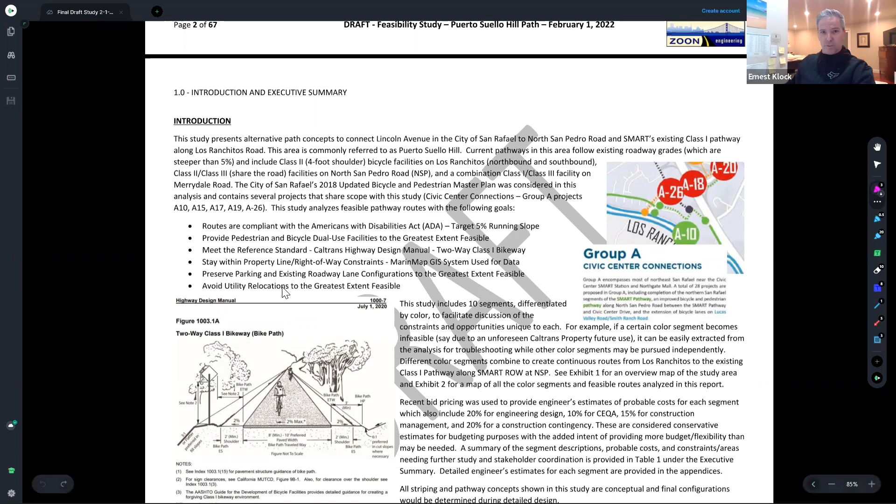And avoid utility relocations to the greatest extent feasible. The highlight reason for taking this approach is really just to look at all the alternatives and identify feasible routes without additional study. As the report was being developed and as I started digging in, I found there was a need to do significant more stakeholder coordination to come up with solutions to some of the identified constraints. So at this level, the report as is gives the stakeholders some options of routes to study further, but there is definitely more analysis needed to further the results and get to design level documents and hit all the constraints.

So this is an aerial view of the study area highlighted in yellow. The existing Caltrans class 1 path is denoted by this pink line. It ends at the top of Merrydale here and joins the roadway—that was one of the first connection points for the pathway alternatives. And then the existing SMART class 1 path is here at the bottom of the document, and that was the terminus or other connection point to this study.

In looking at the routes, we came up with 3 alternatives. The first, for lack of a better naming convention, is this green route, the Merrydale North San Pedro route, that comes down through this green segment, connects to a cyan segment along Merrydale, and then ultimately connects to North San Pedro Road going this way. Though not officially part of the study, we did notice there is a vital link to get this eastern connection over to Marin Civic Center, Venetia Valley School. So we did analyze a short segment we termed light blue here to make that connection and not leave cyclists traveling eastbound stranded at this intersection. But really the analysis does look at the Merrydale North San Pedro route as one continuous route to connect down to the SMART path here.

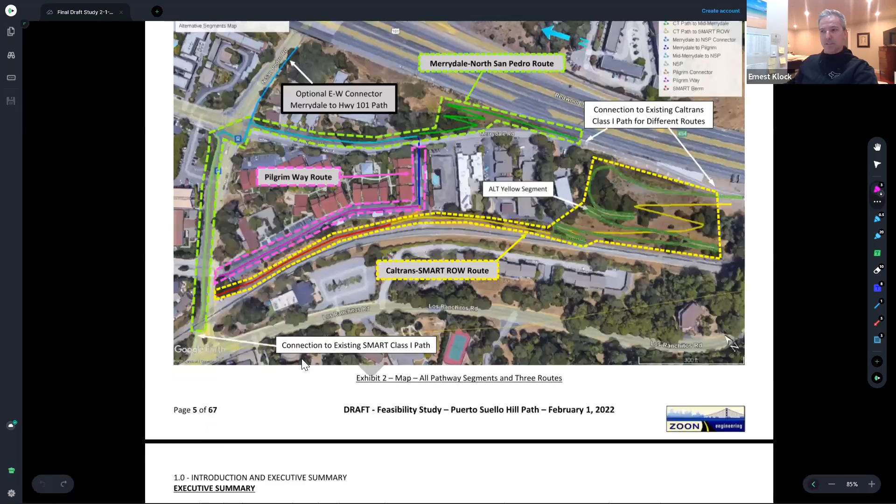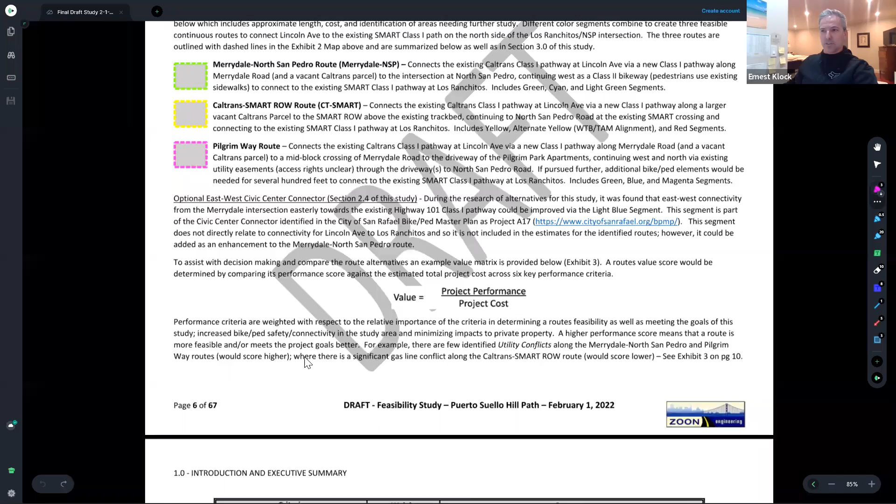Before we do that, the executive summary highlights the constraints associated with the route. I'll skip forward to highlight a useful tool in planning: getting stakeholder input on a performance score weighed against a cost estimate to come up with a value score for each alternative.

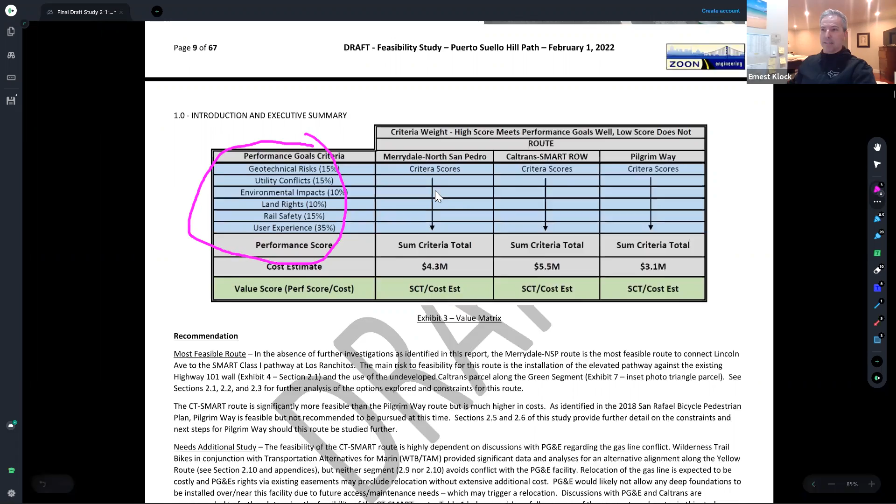As I develop each of these routes, I identify performance goal criteria that can impact the feasibility of a route and the user experience, along with the constraints of implementing it. If desired, you could assign criteria scores to each segment and weigh them, maybe in a public forum for feedback. This part of the report discusses the rationale for each criterion, how it's developed, and how it could be used to analyze these routes.

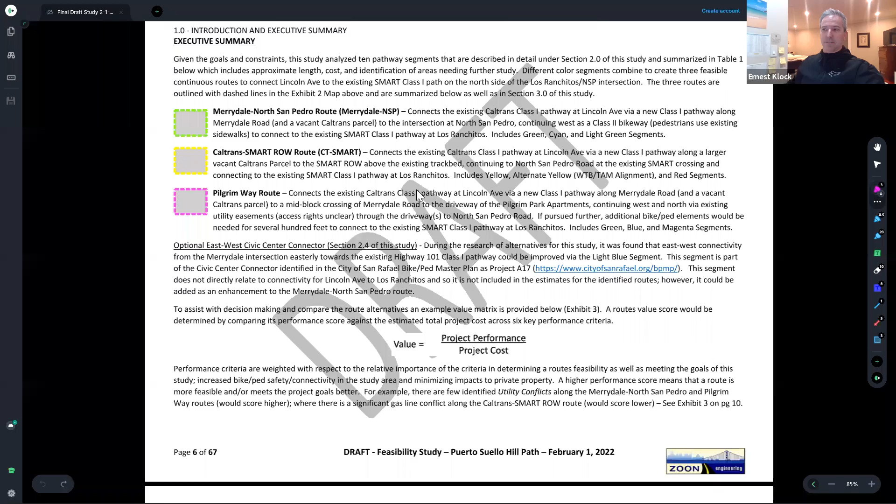In the executive summary, we have a summary table highlighting all the areas needing further study for the different segments. If you combine these segments, you get a continuous route down from the Highway 101 path to the SMART right-of-way, existing Class 1, at Los Ranchitos and North San Pedro.

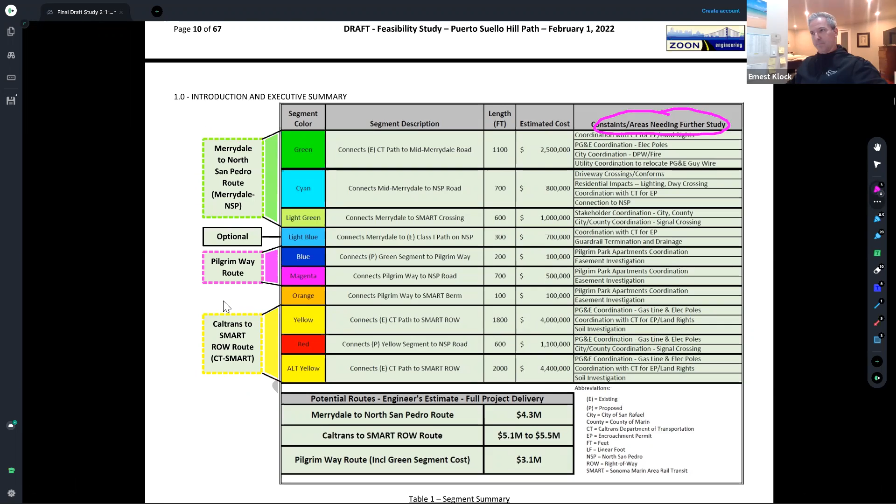Let's look at the first green segment. Again, this is a little plan view. It utilizes an existing Caltrans parcel, probably left over from the freeway development. This segment traverses a portion of the top of Merrydale Road, crosses the hillside, and comes out right at this Pilgrim Way entrance.

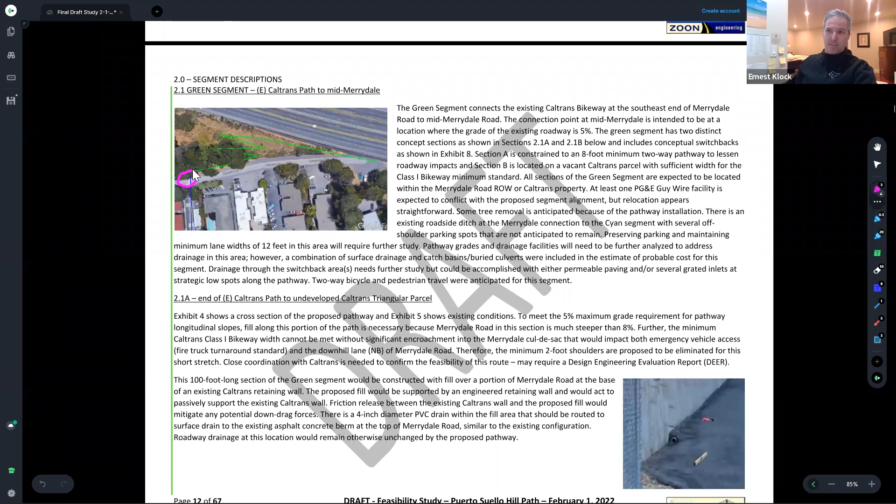The green segment has certain characteristics. One of the hardest things is fitting the pathway in at the top of Merrydale, so there's a couple things at play here. This is the end of the existing pathway. We all know it's pretty steep, although it's 8% with turnouts to meet ADA. Caltrans, I believe, built this path many years ago, and when it exits here, the roadway grade becomes quite steep.

So when I went out and measured, as evidenced by this pink line, using some smart tools, I found a way to get a 5% grade pathway from the terminus of the existing bike path onto this Caltrans parcel.

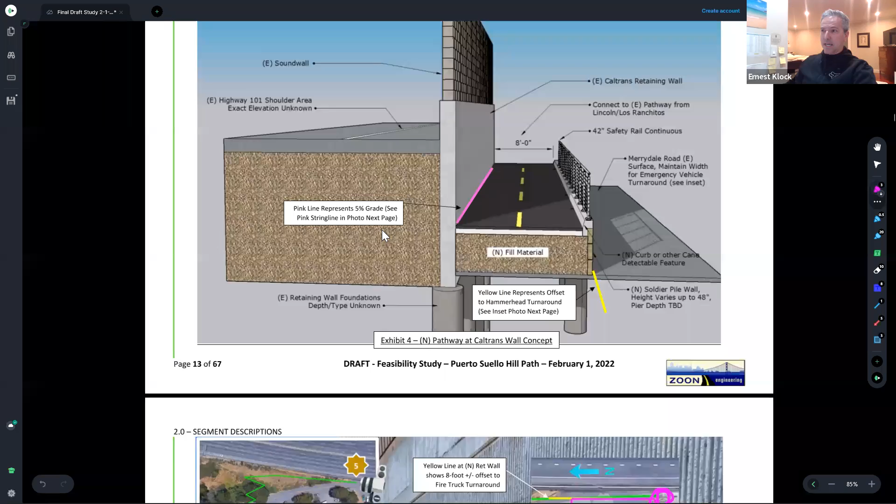And to do that, we need to fill in. This is kind of what the concept cross-section looks like. This is the existing freeway sound wall, this is 101 southbound, and this is what the fill area would look like.

Unfortunately, without significantly modifying Merrydale, doing parking impacts, moving center lines, looking at utility relocations, and impacting the ability for fire trucks to use the turnaround here, without doing that, we're left with an 8-foot path. So you do lose some of that Caltrans design standard, the 2-foot shoulders for pedestrians to walk.

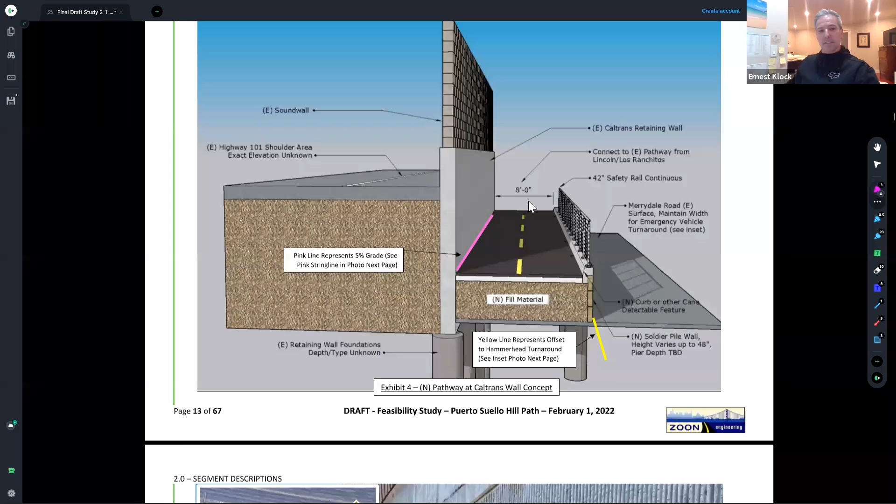Rather than reconfiguring the whole Merrydale intersection with all those impacts, this is one example of how the study analyzes losing those 2-foot shoulders for this very short segment to come up with a more feasible project. That's discussed in more detail in the verbiage of the report.

As you transition out of the top of Merrydale and onto this dirt parcel, you can immediately transition into the standard pathway width, a 12-foot wide path, 8-foot paved with 2-foot shoulders on either side. It's envisioned that you'll have short wood retaining walls on one side and a guardrail on the other due to the steep terrain.

This is a highlight of the area where you would transition out. Again, the idea is to maintain this 12-foot lane, maintain parking along this side, and stay away from moving utility poles and having a lot more impacts associated.

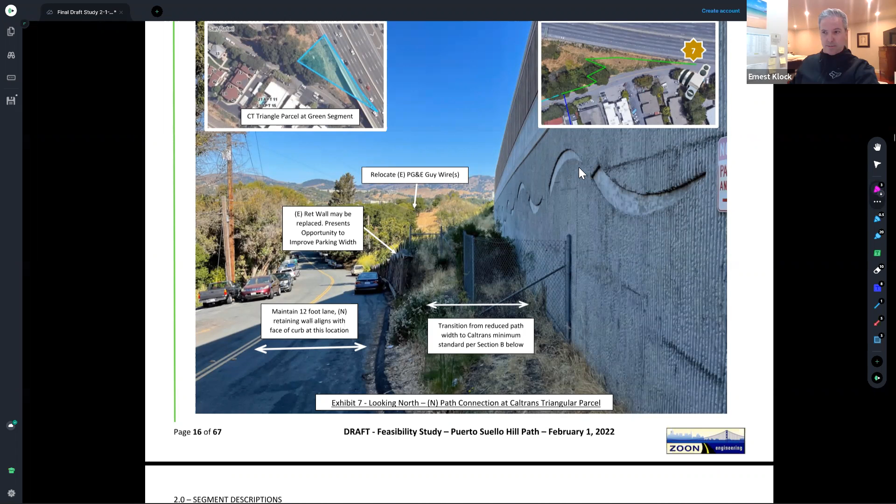The study doesn't say it's not feasible to do these other things. All it says is that if you want to maintain that 12-foot standard all the way through Merrydale, you need to make some concessions and work with stakeholders, namely the City of San Rafael for road widths, San Rafael Fire for adequate access, and the apartment owners across the way to ensure they're not impacted by loss of informal parking.

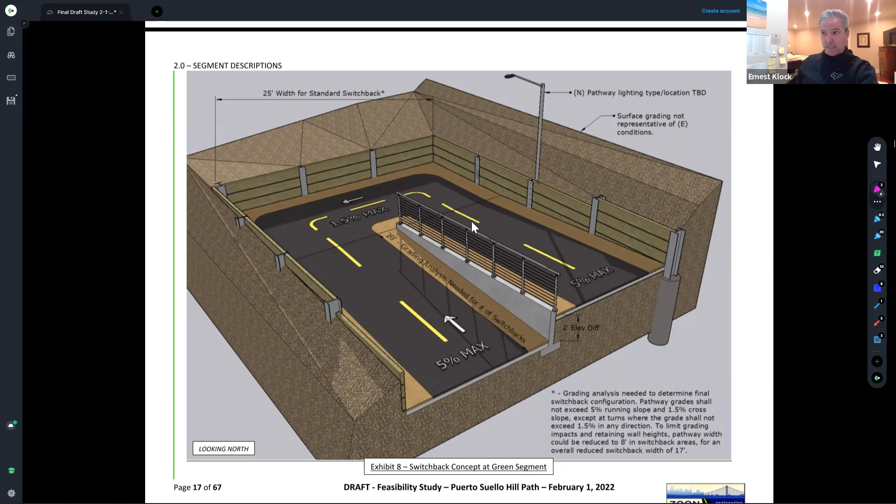Again, just a concept cross-section of what that could look like. If further constraints are identified, you can always make concessions here, but the effort was to fit in this standard 12-foot width anywhere we could.

And that is more information about the same.

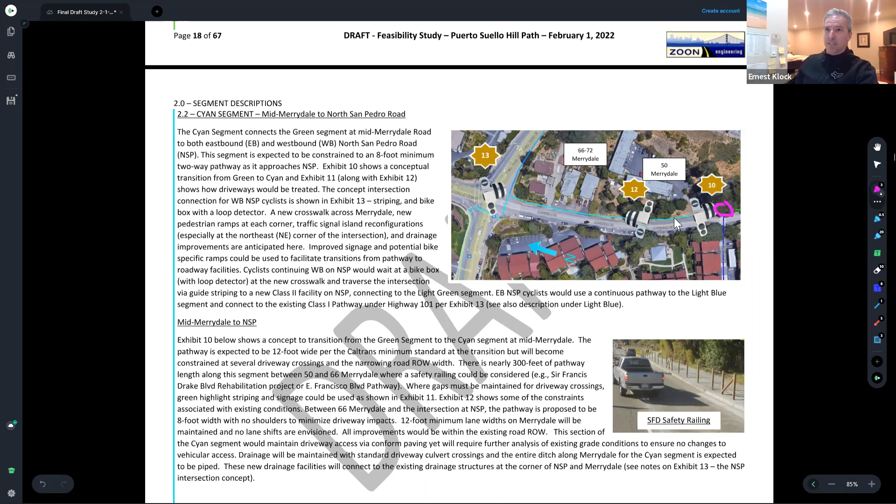We'll move on to the cyan segment. At the end of the green segment here and at Pilgrim Way, we're changing into a more standard suburban roadway cross-section. As we transition out of the green segment into the cyan segment, we're seeing a change to not needing a retaining wall anymore, probably just a retaining curb. There's a drainage ditch that needs to be filled in and culverted, which is part of the estimate. And cyclists are now much closer to the travel roadway, so some kind of barrier between the two would be advisable and helpful.

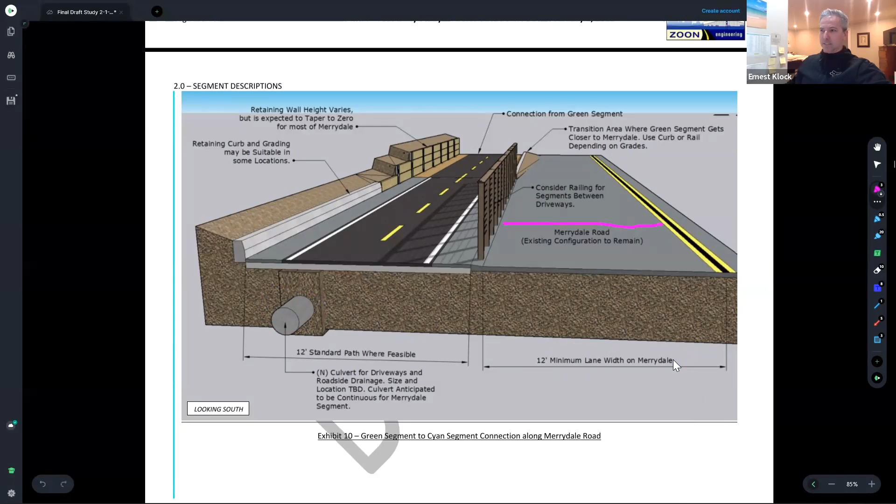As analyzed in the report, we're maintaining the 12-foot minimum lane width here on Merrydale to lessen the impacts associated with that. As you move down Merrydale, you traverse across a couple of driveways, shown here, and in order to meet roadway grades and not create barriers to accessing those driveways with retaining walls or curbs, we're looking at...

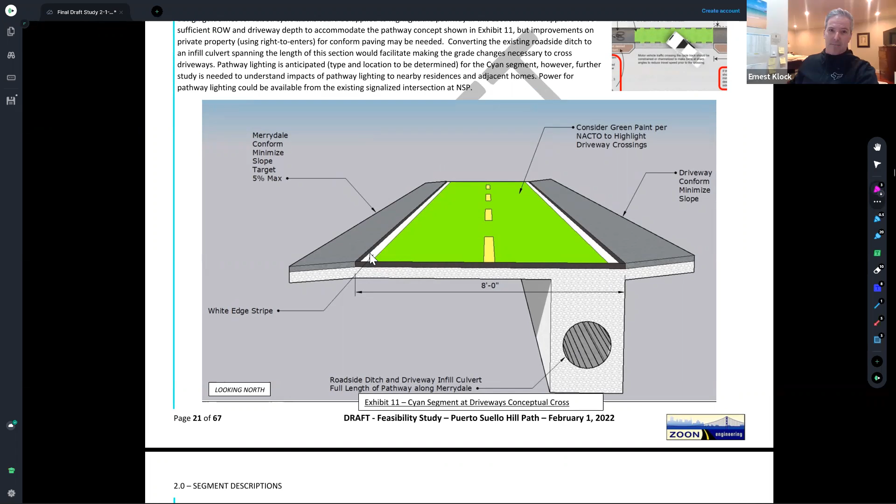A cross-section that kind of looks like this, losing those 2-foot shoulders but being able to keep the grading such that people can still enter their driveways. It's acknowledged that this pathway will traverse these driveways, and it's never a great idea to have these conflicting movements, but somewhat unavoidable with this route. You could get creative with colorization, include some bollards on the roadway to highlight cyclists, and add signage and lighting to make sure those conflict areas are highlighted.

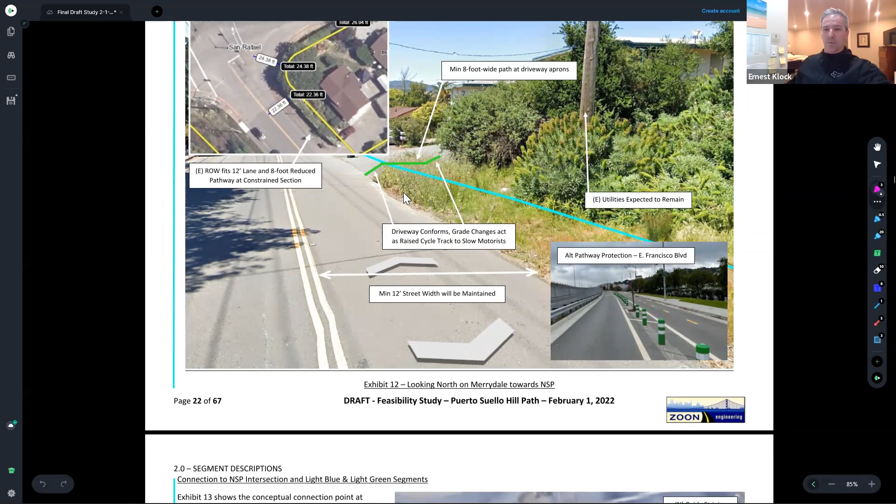As we move into the intersection, the light blue segment continues through to the intersection of North San Pedro and Merrydale. This intersection is controlled by Caltrans, so any changes, significant or minor, require Caltrans permission. I'm working with Caltrans on what they have planned here, trying to hold the islands and existing constraints, not move signal poles, since that can be very costly, although Caltrans may have plans for moving that anyway.

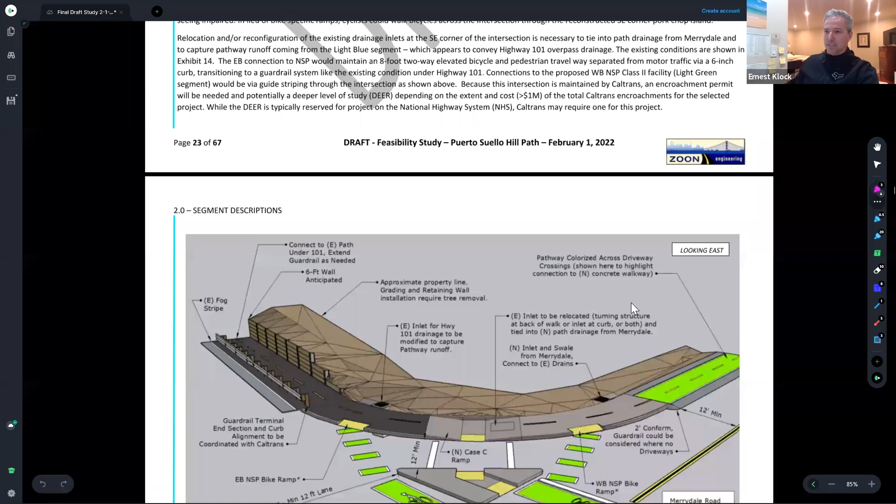As you come into the intersection, there are some options for treating it. This is one concept as you come off Merrydale Road and make that connection eastward to Venetia Valley. This is the light blue segment we talked about as optional, but this is one way to maintain ADA access and allow bicyclists and pedestrians to mix in this area. There are probably many options—this was just one that came to mind. There's definitely right of way and space to fit this in. This is the existing island, and the right of way line is back here in yellow, with lots of room to make these improvements. We want to reach out to Caltrans, the city, and maybe the county to see where the opportunities are for different alternatives.

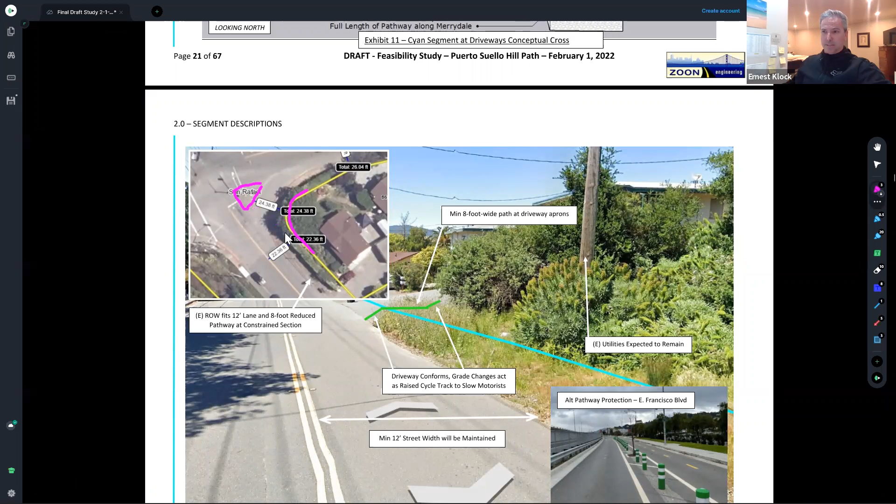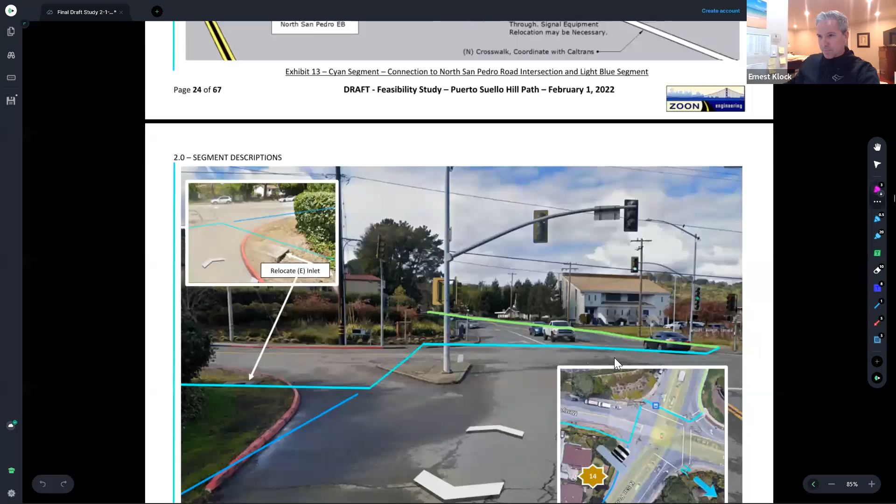As we get into the intersection, let's see where we're going next. This is that concept—you can see just how much room there is here and what the intersection currently looks like. We'll go over the light blue segment real quick.

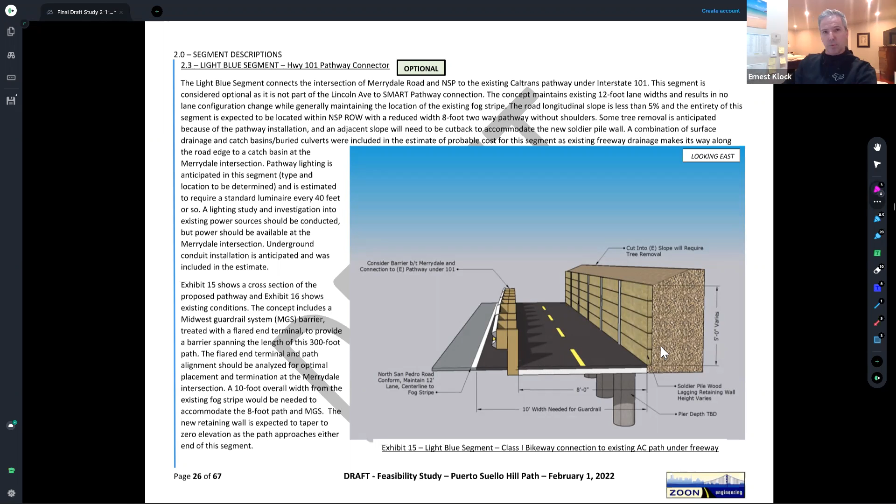As you turn east, that would be going this direction in the photo. There's plenty of room to provide a retaining wall and a separated path with guardrail, similar to how it's treated underneath the freeway, so extending that seemed feasible. For roadway width, we're looking at deleting those 2-foot shoulder sections to keep everything within the roadway, but with further analysis, surveys, striping, and working with Caltrans on what they're comfortable with, you may be able to fit back those 2-foot shoulders on either side for this option. As demonstrated in this photo, you do have a lot of room here.

And then as we turn west onto North San Pedro, we're looking at this segment between the Merrydale intersection and the Los Ranchitos intersection.

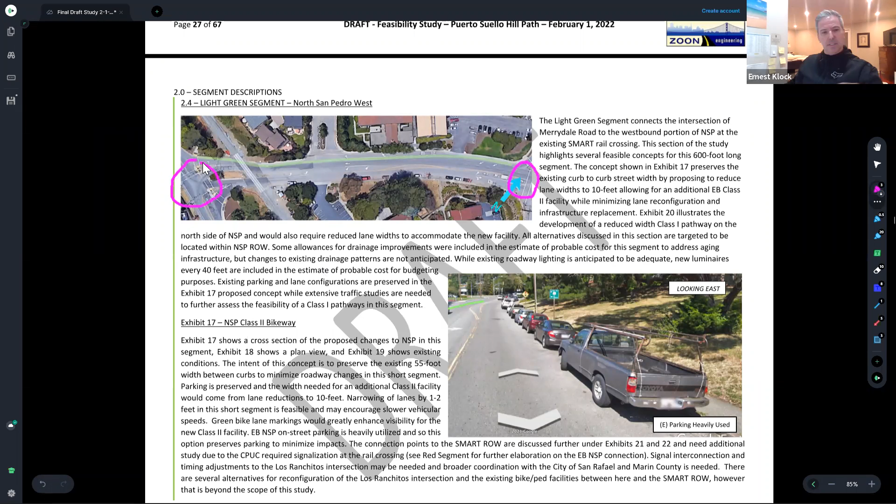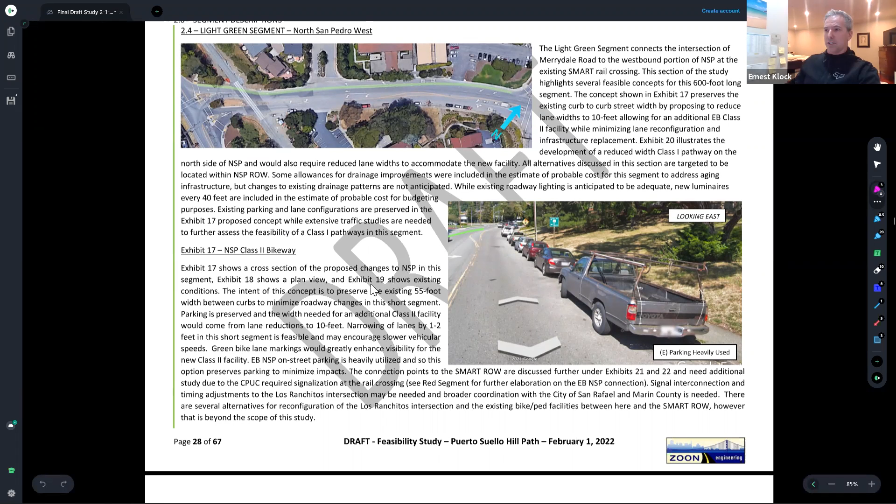This area is significantly constrained by the number of through vehicle lanes, cars parked on the road, and turning movements into Sequoia, a roadway that heads into some townhomes just before Los Ranchitos.

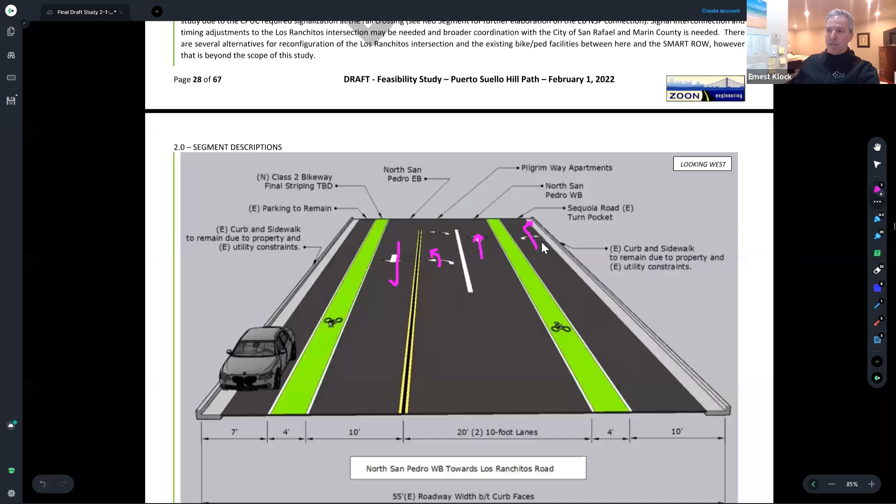The concept here really is just improvements to what's out there. I thought about removing the parking and creating a lot of changes, but maintaining all these movements became very difficult without further surveys and information, and more importantly, feedback from the agencies about whether some of these things can move. There are significant opportunities if the agencies identify that parking is not needed along this side.

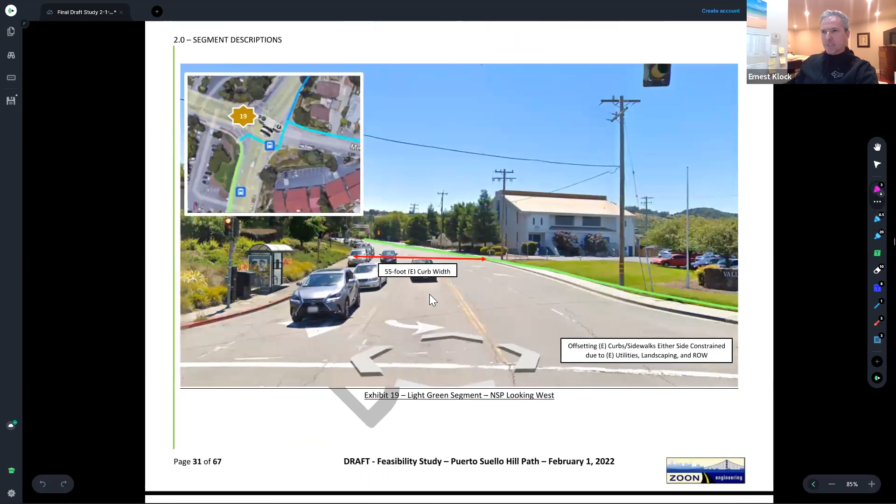You can look at getting creative with things like shifting the whole roadway to the south and putting a dedicated Class 1 facility in place of the sidewalk on the north side. You can flip this configuration and have the Class 1 facility located on this side if you're taking the parking here. So there are quite a few options, but really that was outside of the scope of this study.

What I'm showing is that these are some feasible alternatives. If you get some constraints from the stakeholders, hire a designer, get some surveys, accurately identify that right of way, and work with the utilities to see if they're willing to move some of the constraints, you really start opening up these options in this short segment.

The last thing acknowledged in the report is that the CPUC will require signalization of this intersection at the existing SMART crossing. Where exactly that signal lands is very important and would require further study. There are some ideas to put that signal here at the Sequoia entrance to these townhomes, but it's very close to the existing train crossing here by Los Ranchitos and close to the Los Ranchitos signal itself.

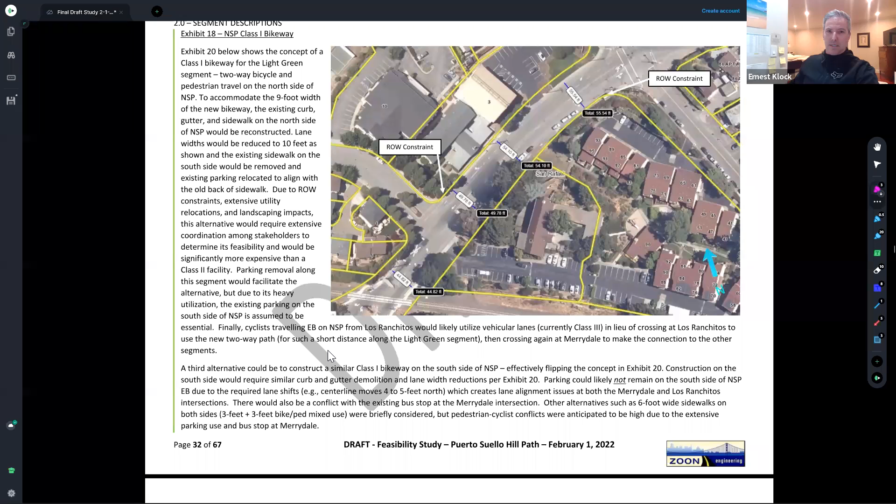So there's a lot more stakeholder coordination that needs to happen to vet the viability of this, what it looks like, and whether the Class 2 as shown in the report or a Class 1 really works better here. Again, the report is just trying to highlight all the constraints necessary to move this segment to the next phase.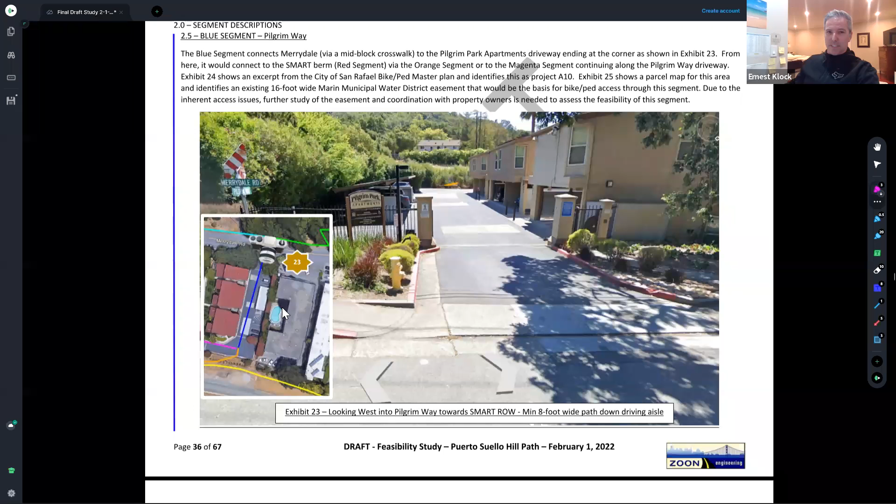This is the Pilgrim Way segment. As we leave Merrydale from the green and cyan segments we talked about, we're heading down into a residential area. The reason this one was even looked at, I'll say upfront it's pretty infeasible, but it was identified in the San Rafael's bike ped plan as a viable segment.

It's represented by these lines. It appears to utilize an existing access easement for Pilgrim Way, an MMWD potential easement, and some other type of easement here. Whether or not it's a good idea to put cyclists into this area, and if the private property owner would cooperate, and the nature of those easements, needs to be further investigated.

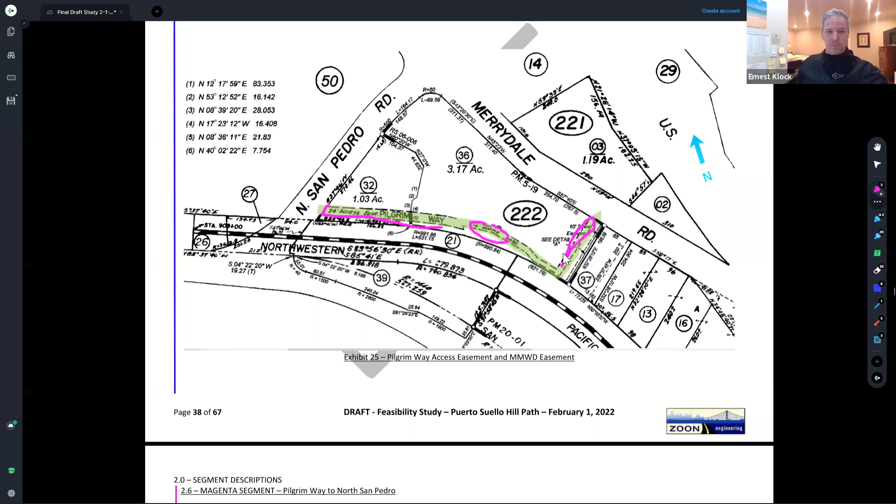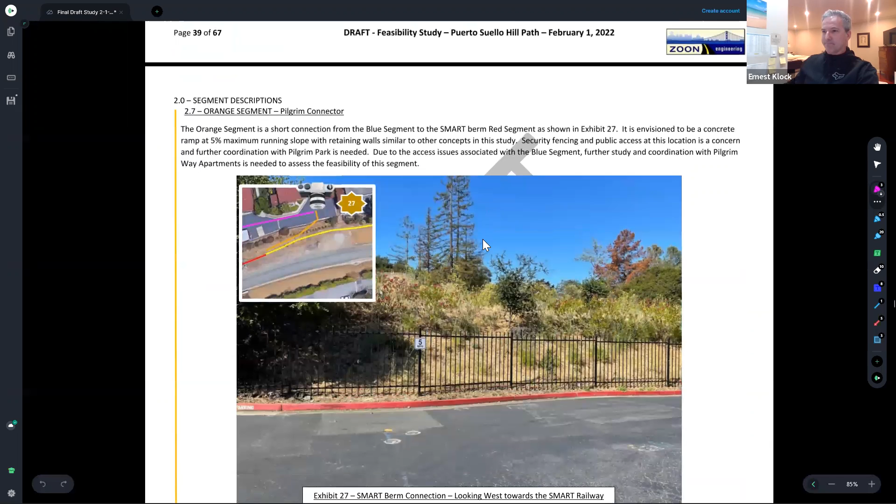At this point, personally, when I did the report, I didn't see this as really a feasible segment without a lot of additional study to make sure it works, but it was looked at due to its identification in the San Rafael bike ped plan. This orange segment is just to hop up from there and get into the SMART right of way.

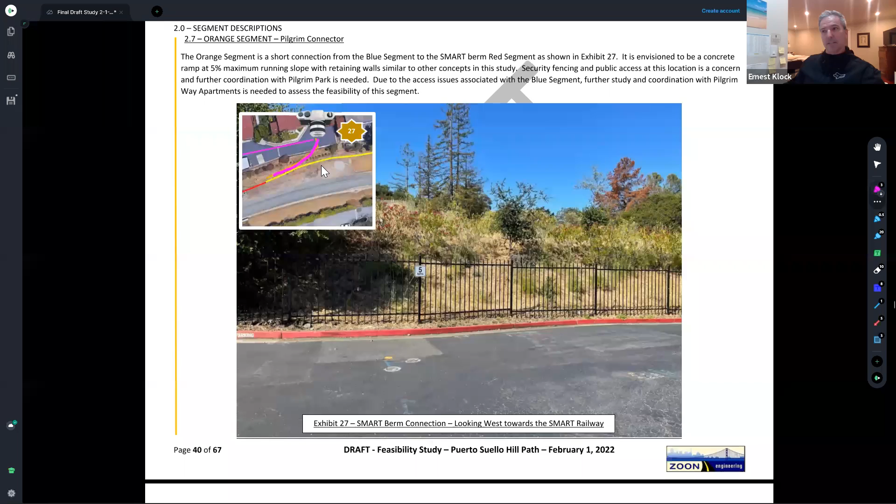If ever there was an opportunity to just get off of the blue segment here out of the parking lot and come up onto the SMART berm, that might make it a little bit more palatable, but that's just there as a highlight of what further you need to study to get that feasible.

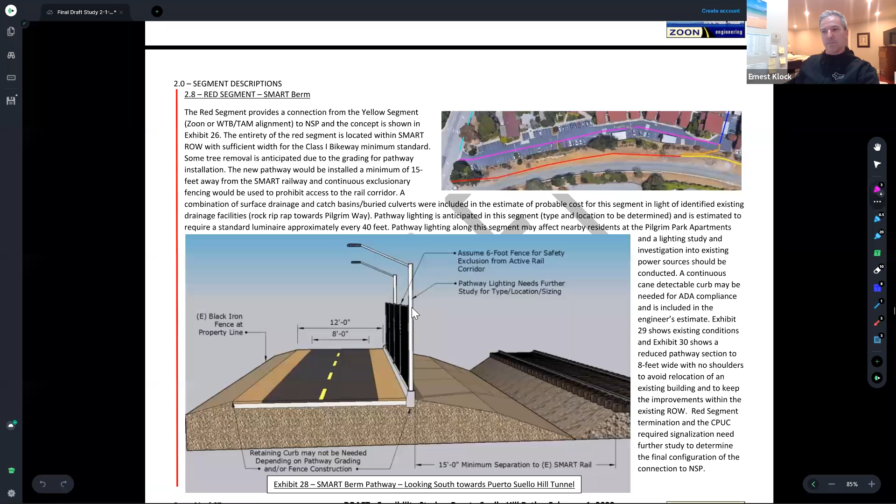This red segment then tails off from it, basically the SMART berm from the North San Pedro roadway at Los Ranchitos, coming along the SMART berm. This segment's pretty easy to visualize. There's a lot of room on the berm right now, it kind of lends itself. The grade is not difficult to achieve, that 5% running slope, and the pathway width fits just fine.

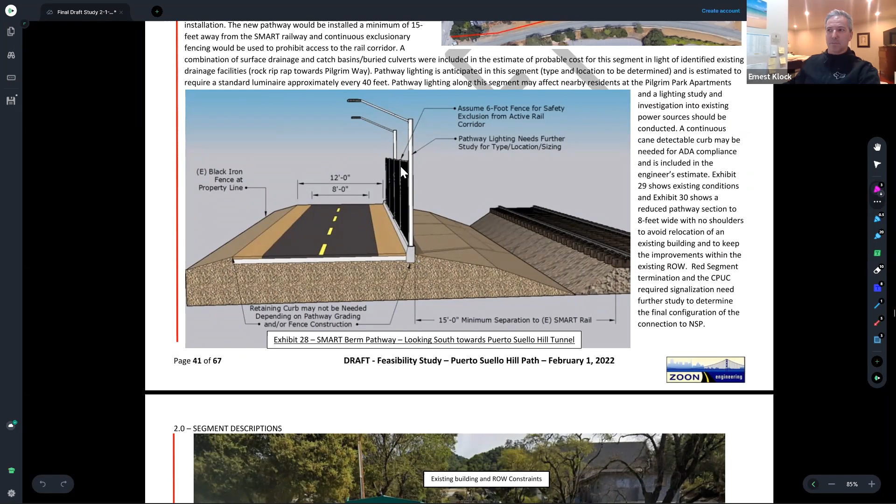It would require a 15-foot separation from the edge of the rail to the edge of the path, and some kind of fence for safety and exclusion of users from the rail corridor.

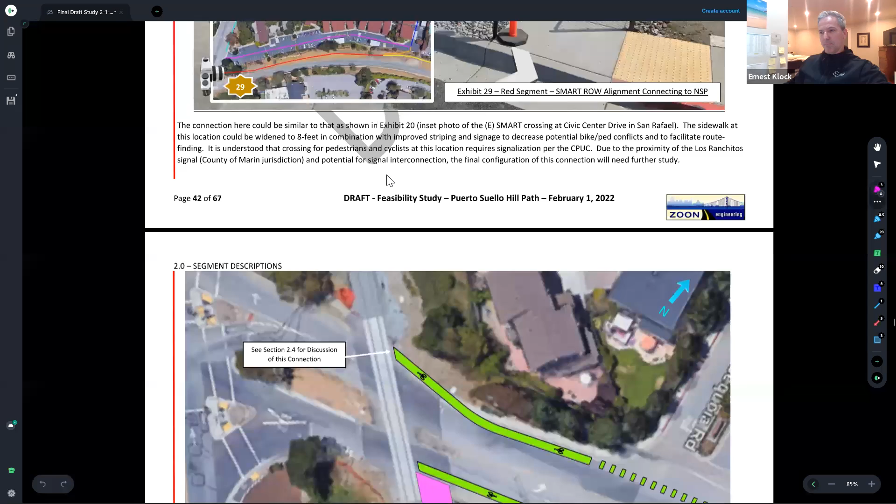So a lot of this connection still needs to be worked out, especially in tandem with where that signal goes. Does it go here at Sequoia? Is it going right here at the SMART crossing, and how does it interact with the existing signal at Ranchitos?

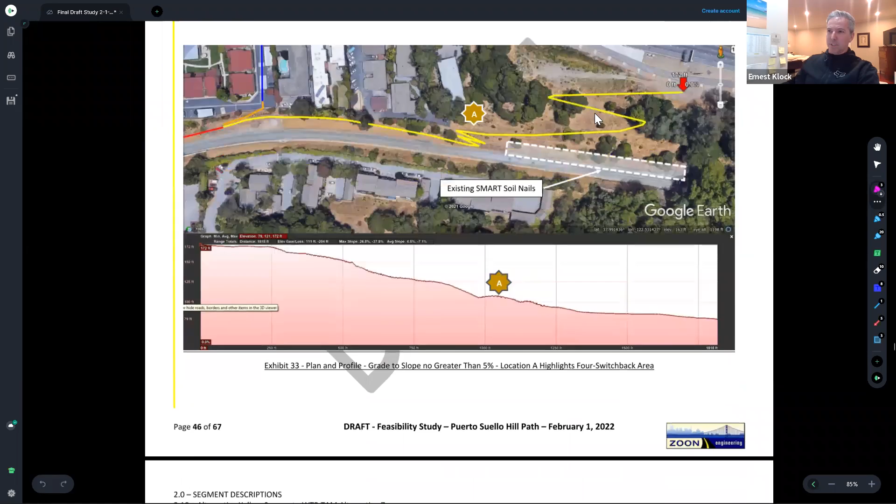This yellow segment is very similar to section 2.9's yellow segment. This was Zoon's take on what it takes to get down the hill, and it's very similar to WTB TAM's take on what it takes to get down this hillside. So I'll just highlight the constraints associated with both - the alignments are similar, the costs are similar, and the constraints are all very similar.

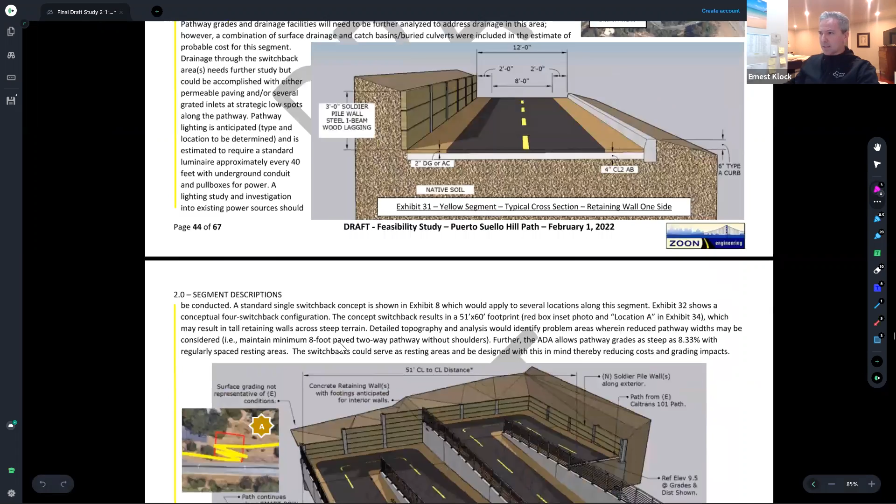As you come down most of this Caltrans parcel, to orient everybody, this is the existing pathway on 101, and this is Marydale, the top of the Marydale cul-de-sac. This path diverges as quickly as possible to come across this Caltrans parcel and down into the right-of-way.

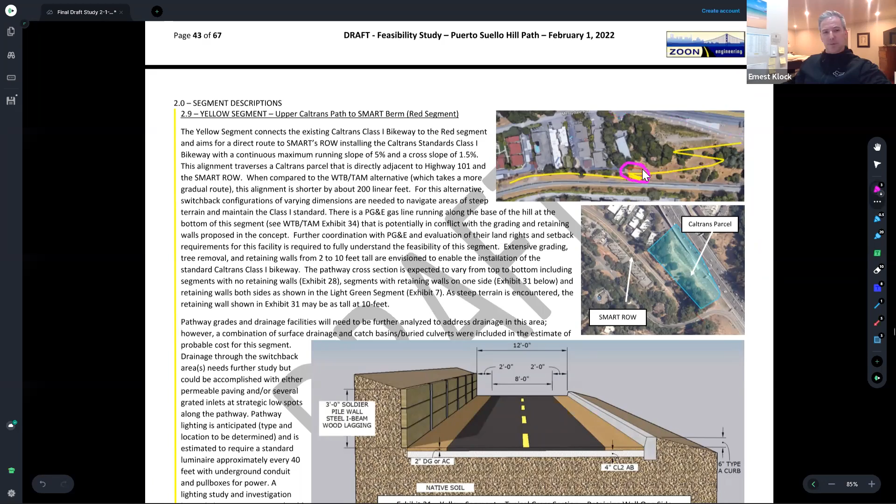This area right here is an area of steep terrain. Before we get there, this is what the path would look like along most of this yellow alignment - it's a very low retaining wall, and the pathway standard can fit.

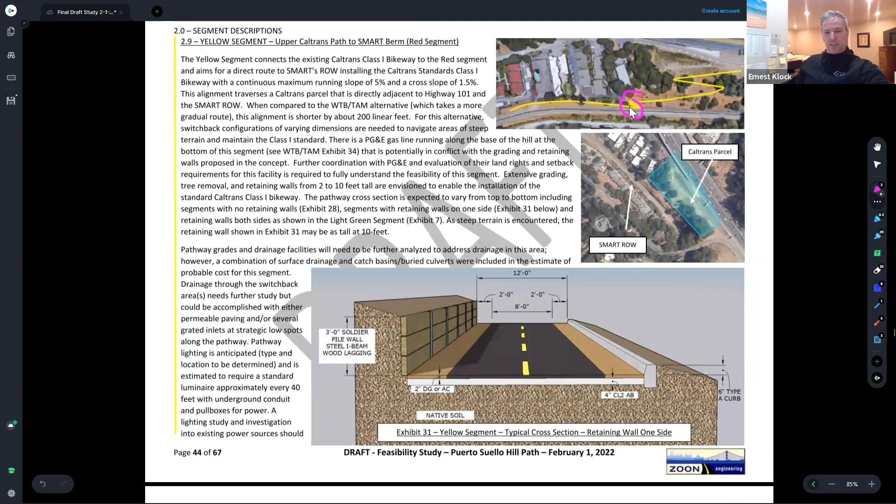In this area of steep terrain and concern, this is one concept for how you could switch back all the way down. This is quite a big footprint, and there's some significant grading. The retaining wall heights are anticipated to go from 2 to 10 feet. So there are some things to consider when implementing this type of solution to coming down off of this hillside.

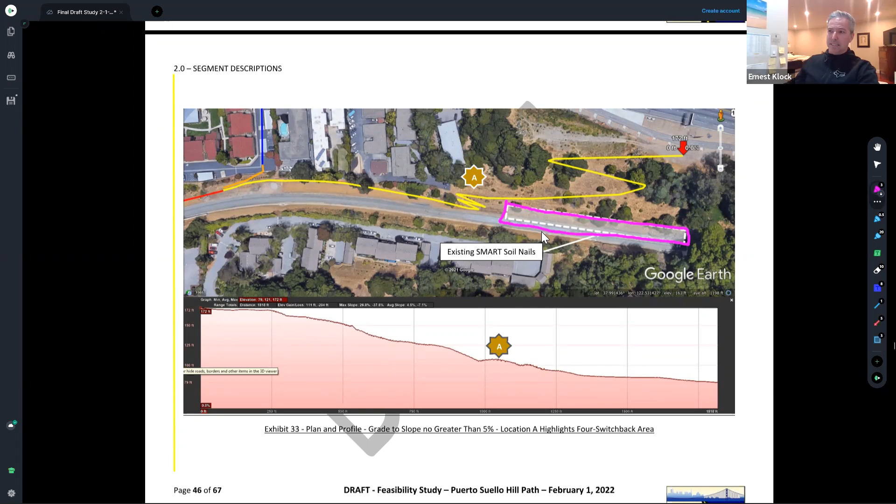I'll just highlight a couple things. SMART has some existing soil nail geotechnical stabilization measures here. Those could conflict with some of the alignment we're talking about, because those soil nails go down into the ground, and this solution would involve piers and retaining walls getting into that. There may be some concerns with that.

WTB TAM also identified these areas of geotechnical instability. WTB TAM does a good job of aligning their path around these to avoid most of them, but you do get into some here. These aren't showstoppers - these are just things that need to be considered when furthering design of this alternative.

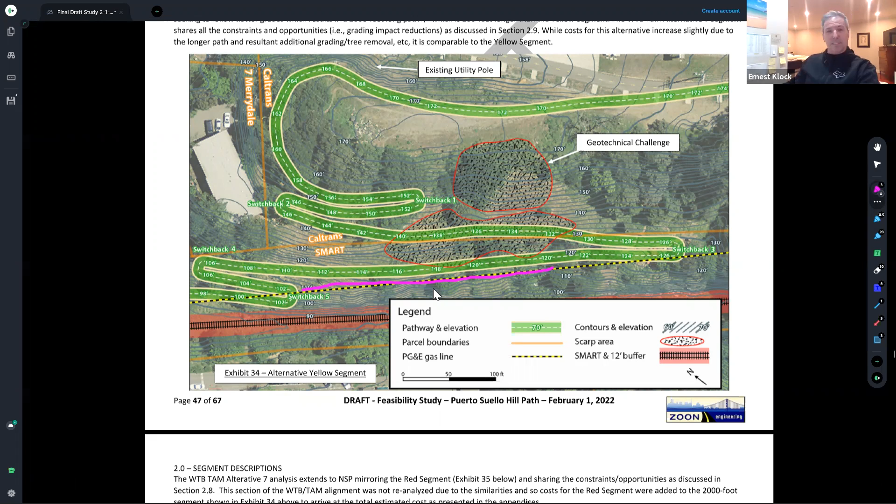One of the major constraints associated with both these alternatives through this segment is this existing gas line. We're aware of it - PG&E has rights to be here, presumably through an easement agreement or some kind of legal land right. Investigating that easement language and what rights they have will impact the feasibility of this, so furthering those conversations with PG&E would help.

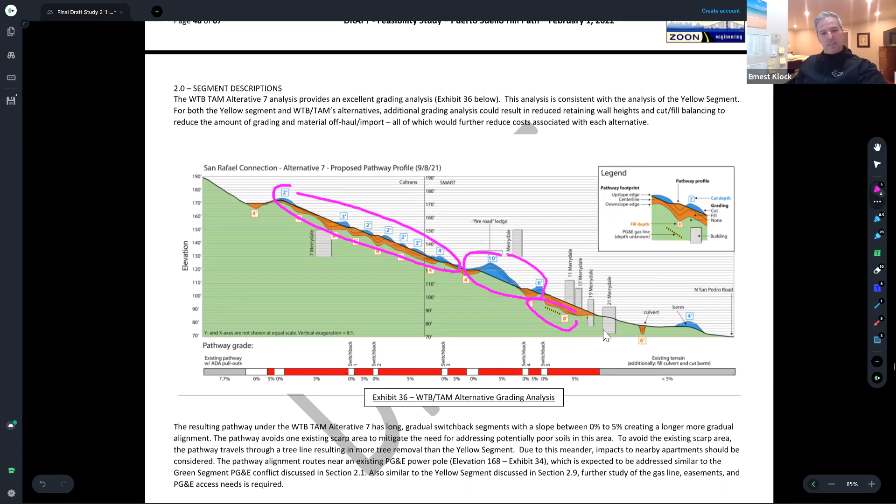Iron those out. WTB TAM has very good grading analysis here, and what they think the retaining wall heights would be - as you can see, mostly 2 to 3 to 4 feet, but in some areas as high as 10 feet, as well as cuts as deep as 8 feet. That's consistent with Zoon's analysis of the yellow segment.

The report just goes on to summarize how you link the different segments, again highlighting this as an optional connector, with the yellow-red route being the next one.

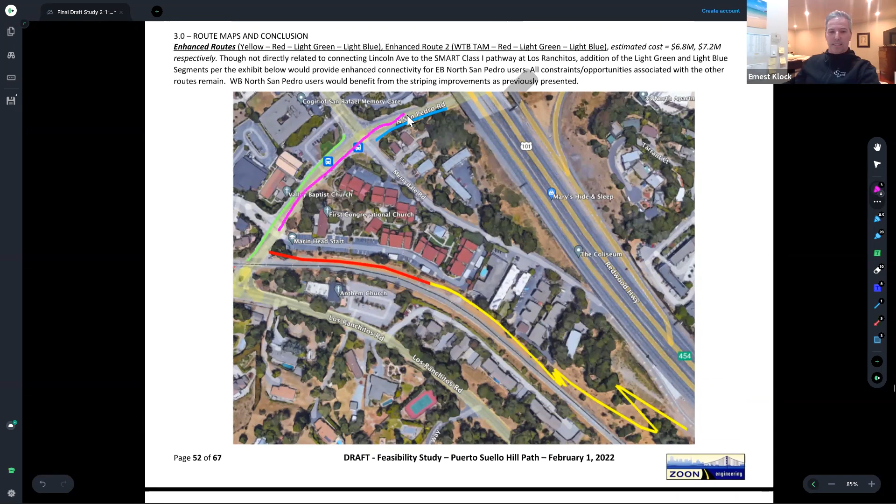And then a consideration for including many of the project elements to link the corridor, not only north-south, which was the purpose of the study, but also east-west with some improvements on North San Pedro, including that connector all the way over to Highway 101.

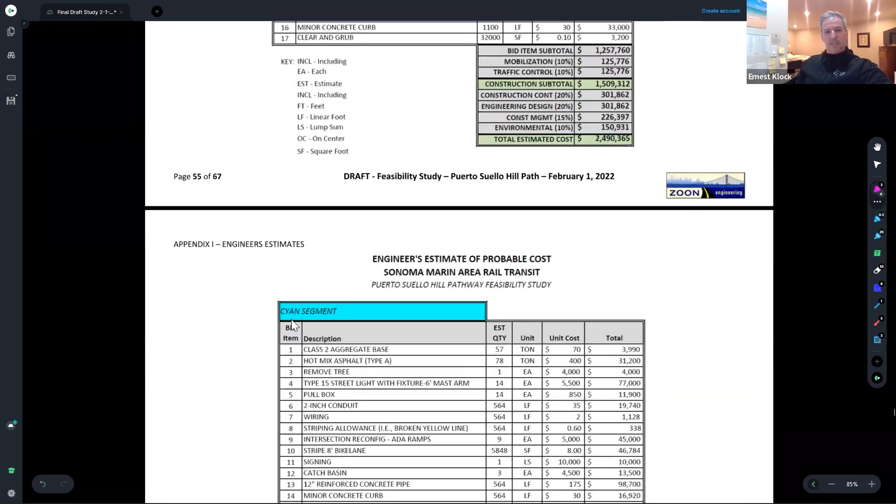And the conclusion goes ahead and highlights all those next steps that you want to do with the stakeholders. Then the report goes on to include detailed estimates. So with that, I'm happy to keep the share open in case people want to go back to documents.

But open it up for questions. Thanks, Ernest. Do any of our members have questions?

Lauren, maybe I can't see the hands or anything, so maybe you could call on people. Kevin, this is Mark. Yes, go ahead.

Okay, thanks. First of all, Ernest, fantastic - that was great. I appreciate the way you walked us through that. I really got a good understanding of what you're trying to do and the alternatives, and it looks like you put a lot of thought into it. So thank you very much.

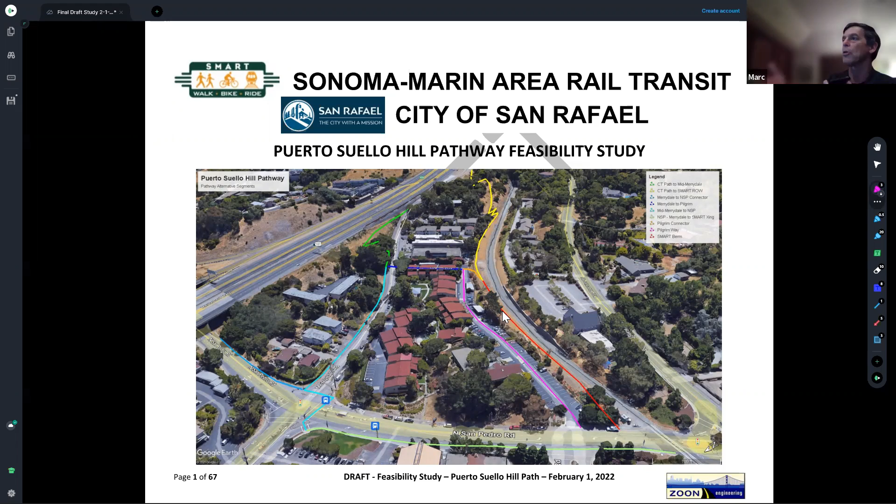I just had maybe a general question, a couple of general questions for you and Bill. In terms of the performance goal criteria you showed early on, how was that established, or who established that? Was that a stakeholder thing, or is that something you work with SMART on?

It was not developed with anyone but myself. As I go through each of these segments, I did a lot of field visits and a lot of research on what was there.

I identified these criteria as being key to the feasibility of any segment, including geotechnical risks, utility conflicts, environmental impacts, tree removal, proximity to private property, noise, lighting, things that might trigger an EIR level document, land rights, working with Caltrans on the parcels they have there to make sure they're okay with the proposed uses, and working with the different stakeholders that own the right of way through there.

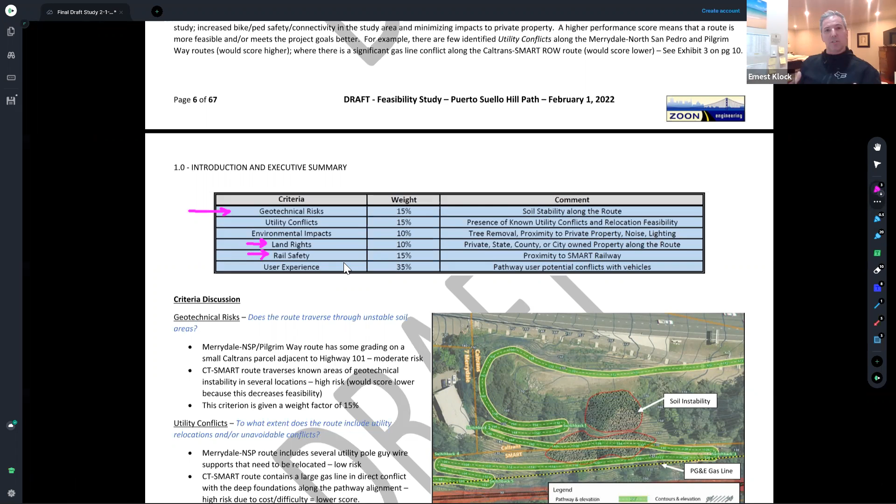And then looking at rail safety and how the different segments relate, whether they're right adjacent to the rail in ways that are dissimilar to the existing pathways along the SMART corridor. One example might be this portion of the path.

So as you're on the SMART berm right next to the rail, that's very similar to a lot of the different pathway alignments we have. But as we get further away and up this steep terrain, you have to think about if you have an accident with a child here or something on the path, how do you get emergency response personnel down to that area? It's much removed from roadways, far out, and on this long circuitous route along the pathway. So when compared to other routes, that may be a consideration for scoring it differently than these other alignments.

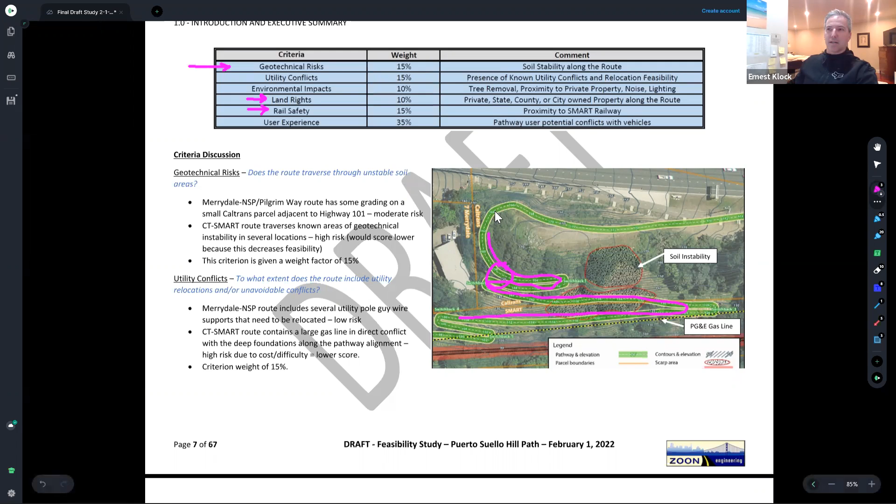That's all the intent is there, to highlight where people might rank certain criteria in this. And the last being user experience, that was given a fairly heavy weight of 35% of the criteria score, because user experience is a very important part, making sure you're giving a cyclist the opportunity to have a good user experience with minimal vehicle interaction.

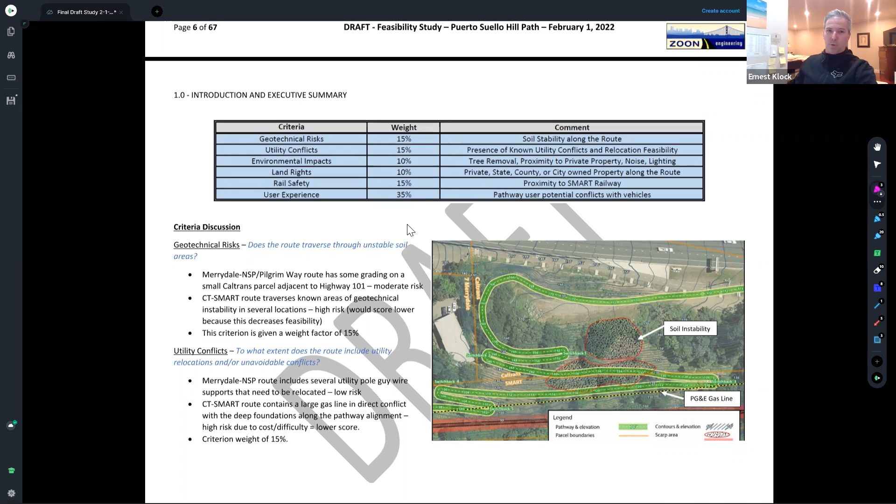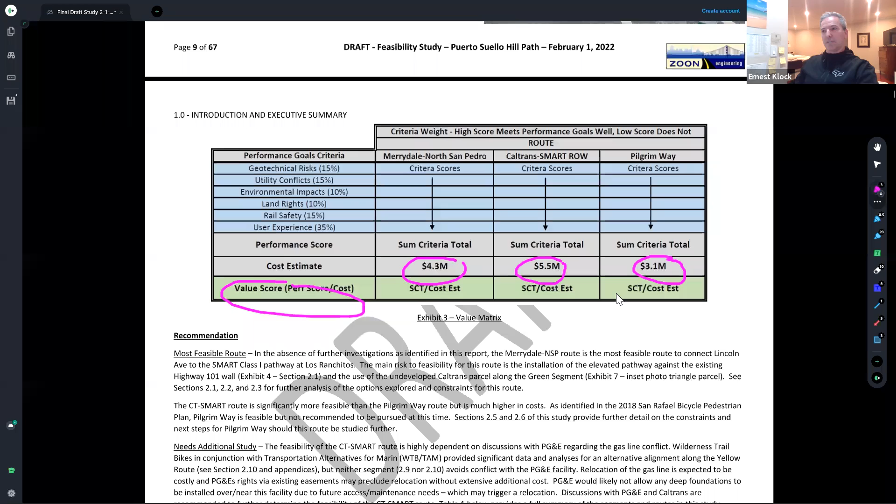So it was developed in a vacuum to answer your question, but it's definitely changeable. That's one reason why we don't have criteria scores here, and there isn't an actual value score. The report provides cost estimates for each of the different segments, but really it's up to SMART and the city to proceed further and assign criteria scores or hold public workshops where those could be developed. That was the intent.

I have an interest here because this is one of my regular bike routes, so I'm familiar with the area pretty well. I gauge what kind of shape I'm in when I return going south there, up the hill. So it's a good one for me.

Maybe this is for Bill as much as anything, and Lauren, in terms of the process and the steps that are going to happen here on out. Could you help us tell us a little bit more about the process that has to unfold?

Sure, I'm happy to field that. Thanks, Bill. Good to see you, Bill. Haven't seen you in a while. No, just good to see you. I haven't seen you in a long time. Good to see you guys too.

This was initiated by one of our board members, the mayor of San Rafael. So I think ultimately this is going to circle back to the board, probably in a presentation.

Again, the focus was feasibility. Are these paths even feasible? Which I think really ties a lot to the criteria that Ernest just walked us through. We still need to get more input from our working group before we're ready to roll this report out publicly. We had a working group on it last week and talked through it, but we need to finalize the report. So I think that's where it goes next.

Bill, let me ask you a follow-up question. What kind of time frame are we looking at here to make a decision? Are we a year away, less than that?

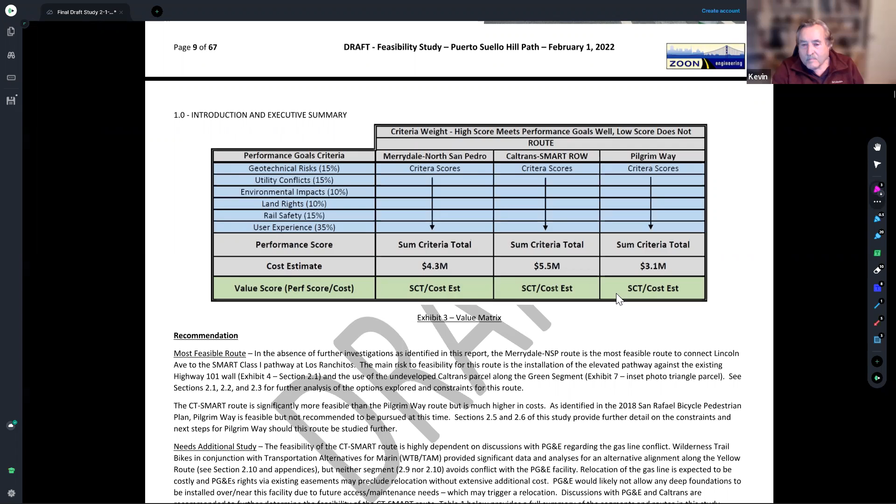Yeah, I had a couple questions about the Merrydale — can't remember what that section is called. It seemed, it looks like it's pretty steep, right there on the page before that, just going up to page, I believe 17. Ernest.

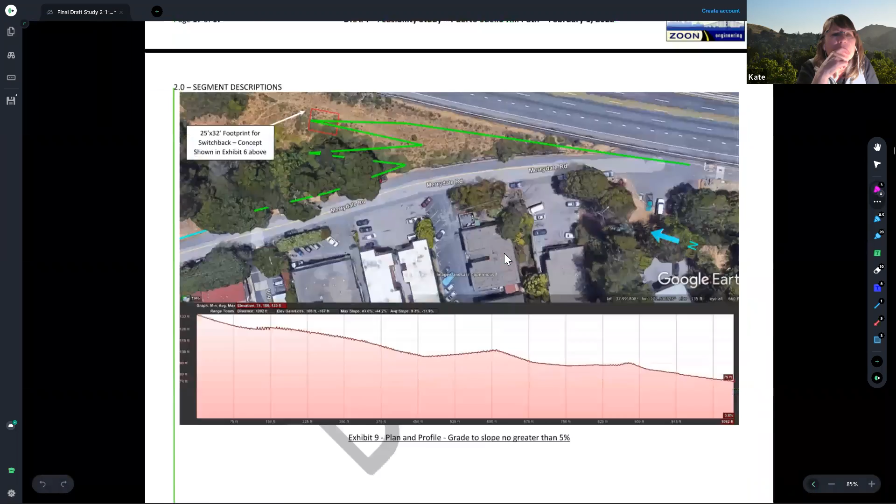Oh no, a little bit further up. One more up. This one or this? That one right there. Yep.

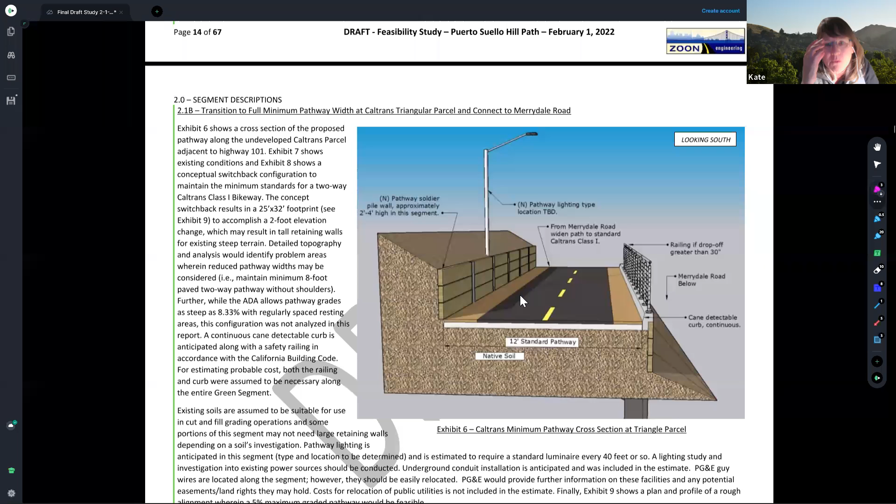Number 15, it just looks like the connection from the existing bike path to Merrydale. Where it narrows, I guess it's one further up. It looks like people would be coming up the hill from Merrydale, and it would go from a 12-foot path to an 8-foot path where people may be on the bike path itself and not visible. I don't know if that's true or not. I can't completely tell from the drawings and photographs, but that would be one concern of mine.

Also, I was wondering if the slope is less than 5% after you do the green switchback on the Caltrans property, because that Merrydale Road seems pretty steep for most of it. I'm wondering if the grade is less than 5% after the point where the switchback meets Merrydale Road.

Yes, I actually measured the roadway, and you're talking about right here where green transitions to this cyan color. It was measured at 6%, but really you're looking at getting a survey, and at 6% versus 5%, it's very easy to make up that 1% grade as you grade out this whole project and carry the 5% off the green and into the cyan and across. It flattens out significantly right out of the frame of this photo and becomes less than 5% all the way down to the intersection.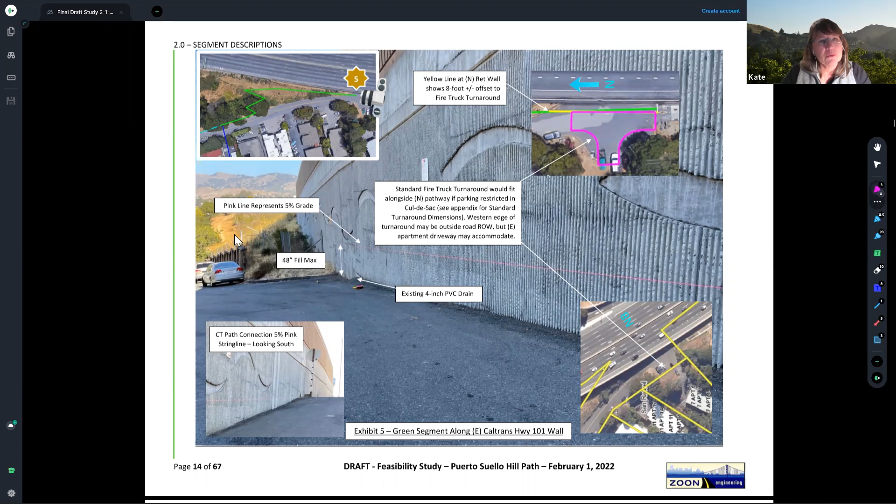My last concern is that I do favor the Caltrans SMART route that WTB TAM has also initiated in terms of doing a feasibility study. The way WTB TAM's route avoided a lot of the trees—I think the trees provide stability on the slope, especially the first few feet of soil. I also think they provide an amenity in terms of shade and beauty for the experience of that ride. So I'd encourage going forward maintaining as many of those native trees as possible on that slope for both of those reasons.

Thank you for the question. There's definitely an ideal alignment to be developed that can avoid the trees, the geotechnical concerns, et cetera.

Thank you. Lauren, I presume the city's been involved in this team looking at these alternatives. Would you care to comment on the city's thinking?

Sure, and maybe April can help me out. But yeah, there's still some things we need to figure out. This is a feasibility study, so there are things we need answers to, like the PG&E utility line that might be under this route we're looking at. We're going to support whatever alignment may work out, and we're still in the exploration phase. So we haven't settled or decided on any one of them.

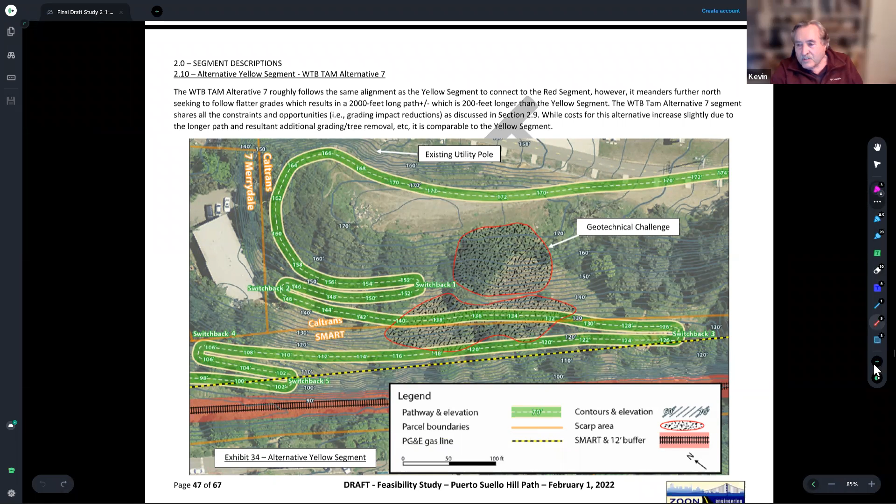Well, can you talk a little more about the process the city will take in taking a position, if that's what you do? I know it's a joint effort—you'll be working with SMART and Caltrans. But I think BPAC, for example, would be very interested in city staff's take on this, and what kind of process you'll go through to make a recommendation.

Sure, I don't think I have a perfect answer for that yet, but I think we do want to take a look at the scoring criteria and make sure everyone's in agreement on how we're going to score these different alignments. Then I think you look at which one scores the best. This is being done in collaboration with SMART—we want to make sure their needs are met. We'll also probably have to deal with Caltrans.

So there's a lot of agencies and authorities that everyone's going to have to be on the same page.

April, do you have anything to add? Yeah, we're just not there yet. This is the initial feasibility study, we're just looking at options. And as Ernest went over, there's several things we need to explore further before any of these routes actually become a legitimate route that we would look into funding and exploring this further. So this is just one of the first steps.

So let me get clarification, and I'll open this up to whoever wants to answer it. Ernest provided a set of criteria, a weighted set of criteria. And Ernest, you said that the scores hadn't been filled in yet. Ultimately, is the work team that's working on this going to try to assign weighted scores?

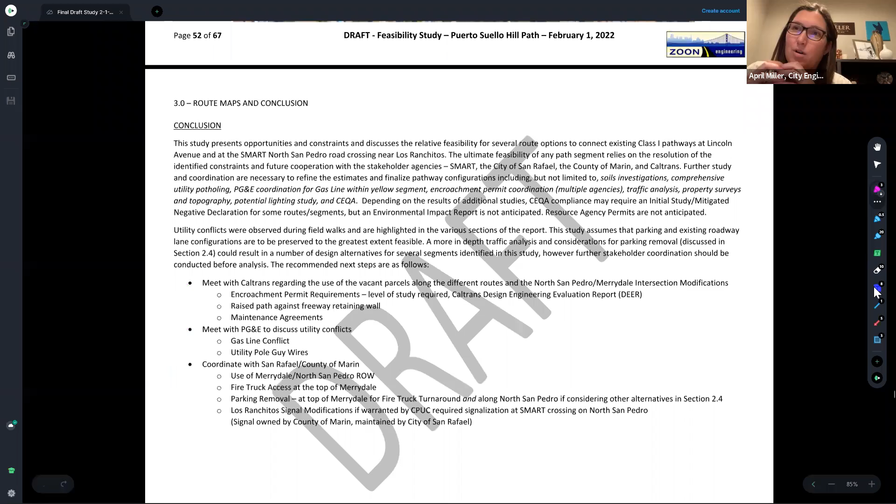Yeah, I'll answer that. So Ernest just came up with a matrix of, this could be one way to score the projects. The city and SMART haven't weighed in on is this the matrix, are these the percentages. It was just an idea of, this is one way to do it. As I said, we're at the very beginning stages. We still need to look at this a little bit closer and decide do we want to rate it like this, or have other things to explore. So we'll look into this further as we move forward.

Okay, well, based upon what you've just said, it doesn't appear that you're going to be ready to go back, or Bill's not going to be ready to go back to SMART within a month and ask the board to make a recommendation or make a decision, actually.

Yeah, it could take more than a month. It just depends on how fast we get input and work on the report. And again, I'm going to go back and report to the board on here's the feasibility study we did, here's what we found. Some of these are probably going to be more feasible than others. And that's probably where we'll leave it.

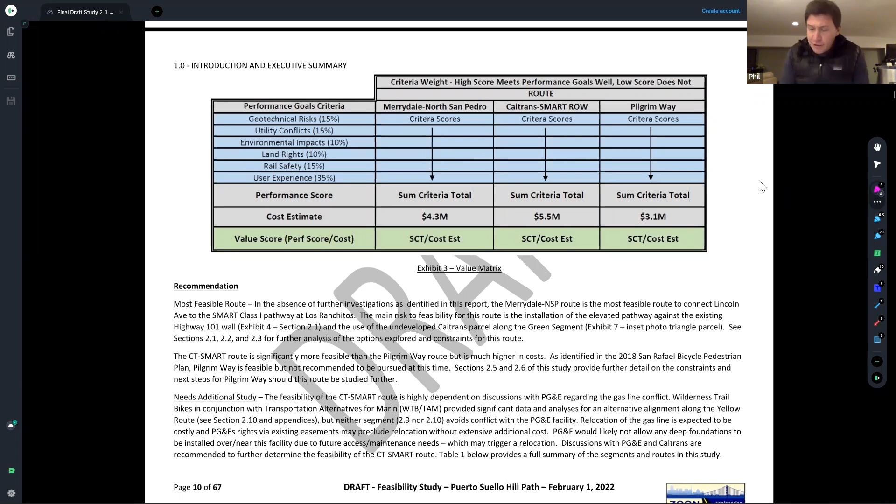Okay, do any other members have questions? I've got a couple questions. Okay. First, Ernest, thank you, that was a wonderful presentation and laid it out very well.

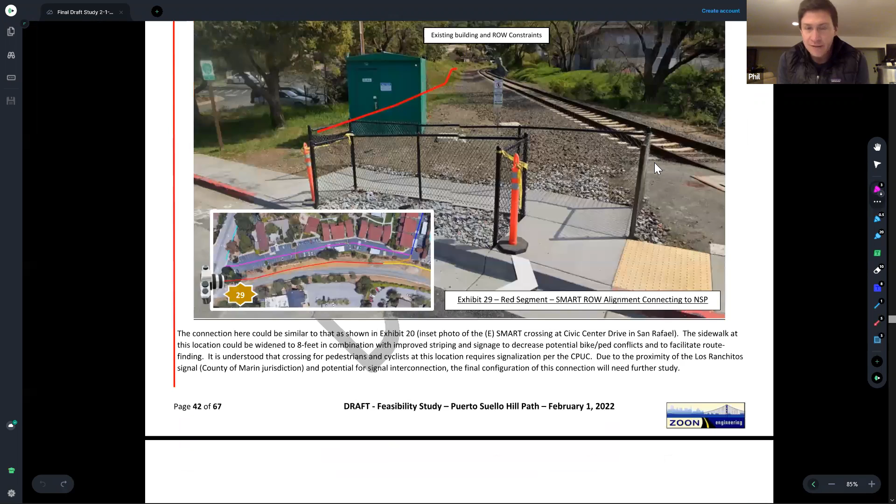On your yellow segment, the steep switchbacks, right around page 45 at the bottom, you had a potential diagram of sort of like 4 switchbacks in a row. Right there, yeah, exactly 45. Is there a, I think that's wonderful for bicycles. I think of this project as, as Kate mentions, the amenity of the trees and just a really pleasant way to get through. As a pedestrian, if I were to encounter that, I would like stairs to make it more direct.

Is there a possibility that you could add stairs to a switchback feature like that? Most definitely. And this configuration looks more ominous than it needs to be on purpose, so that you see kind of the worst case. This is a 5%, but because these areas of the switchback act as rest areas, you can steepen the grades between these to 8% and still meet ADA.

There's a whole dialogue that occurs with the cycling community. Do you want an 8% path? It's pretty steep going up Merrydale, right? Not on the main portion of the road, it's 26% on Merrydale, which is definitely test your endurance.

But for these switchbacks, there's still a lot of development of what the ideal sort of configuration is. And definitely you could have something that's much more pedestrian focused, like a stairway with rails coming up this side or wherever. But yeah, I guess that would be my encouragement.

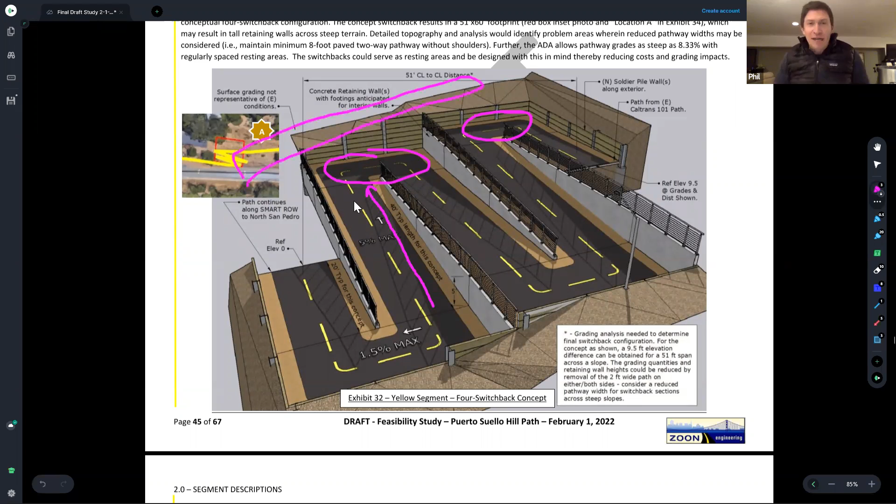So I ride the Merrydale, I ride this section every day to work. And there's lots of people that walk up Merrydale. I mean, there are people that walk through this, and this would certainly be a very pleasant way to get through, separated from going the steep ways down Merrydale and Pilgrim Way. I think those are not nearly as pleasant of an experience to go through. And thinking about pedestrians wanting a more direct route, I think you'd just get a lot more adoption.

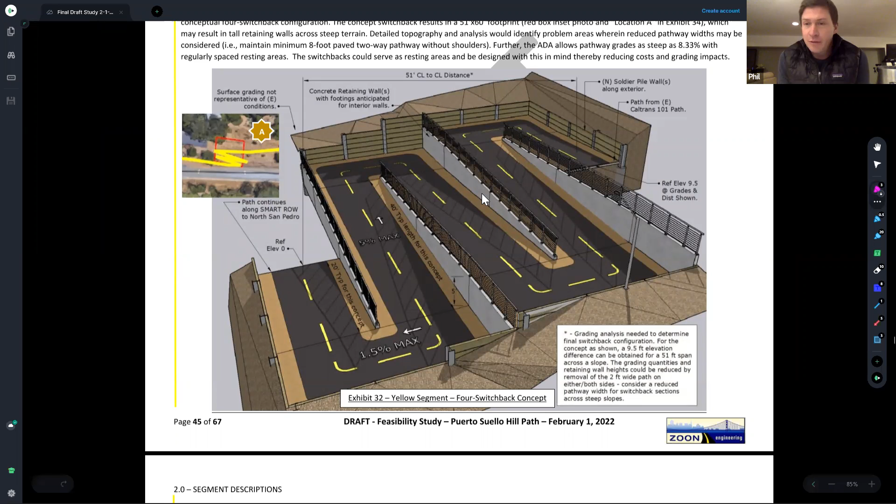My other comment, you don't need to change any slide, but I did have concerns with the blue segment. So whichever way you get down to the bottom of Merrydale Road, if I think about the north-south Greenway as a whole, my dream for it is an all ages and abilities path, which is both the grade and just the comfort and separation from cars. I have 2 little girls. I think about riding this with my 5-year-old.

Currently, my 5-year-old could start at the Madera Bridge, and I would feel very safe riding with her to downtown San Rafael, and we got to get through downtown San Rafael, but then on the path, eventually all the way out to McInnis Park. But this particular blue segment, I would not have my 5-year-old ride on North San Pedro Road there from Merrydale to Los Ranchitos.

Just in my thought process, I know much is being made of this weighted criteria, which isn't settled in anything, but I think the user experience was weighted at 35%. I would weight that much higher than that.

Frankly, there's a way to get through right now. There's two ways to go. I ride it every day. The reason we would do this is to make a really solid improvement. I know this is just a feasibility study, but there's one option that I think is a solid improvement. The other two, I probably wouldn't ever even use myself. A beautiful path along the SMART right of way, then going down the hill, is the thing that's worth doing.

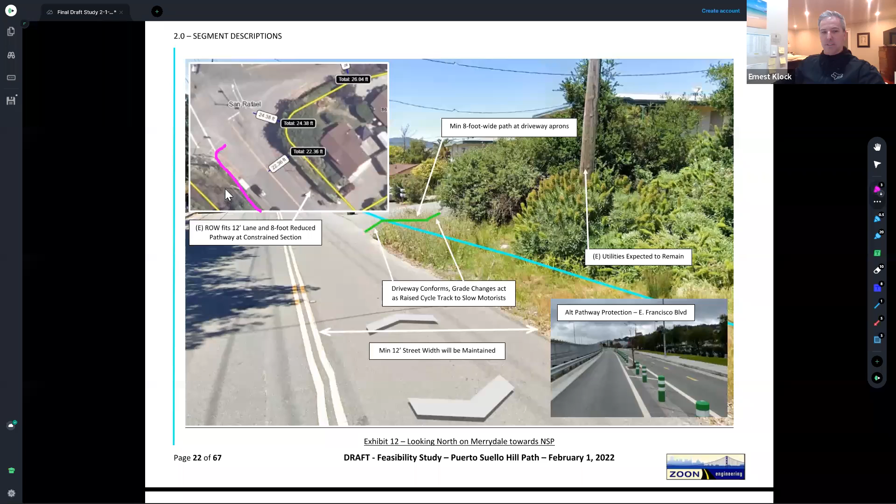One of the constraints that comes to mind is the introduction of a mid-block crosswalk here at the Pilgrim Way crossing to get over onto that side. These things were conceptualized in my mind as I'm going through the study. My head just started to spin with, well, San Rafael's got to decide if they want to take all this parking along here and reconfigure the intersection to make that whole connection work better. It just started blowing up - the opportunities really start to blow up.

I think the purpose is just to put all these options in front of the stakeholders, SMART and San Rafael, have them analyze it and say, you know what, we do want to look at something like that, and further that, and have a little more dialogue on it. So this report is not meant to constrain people. It's just to open their eyes to what I identified as the most feasible route, while also opening it back up to looking at other options with major changes to the infrastructure.

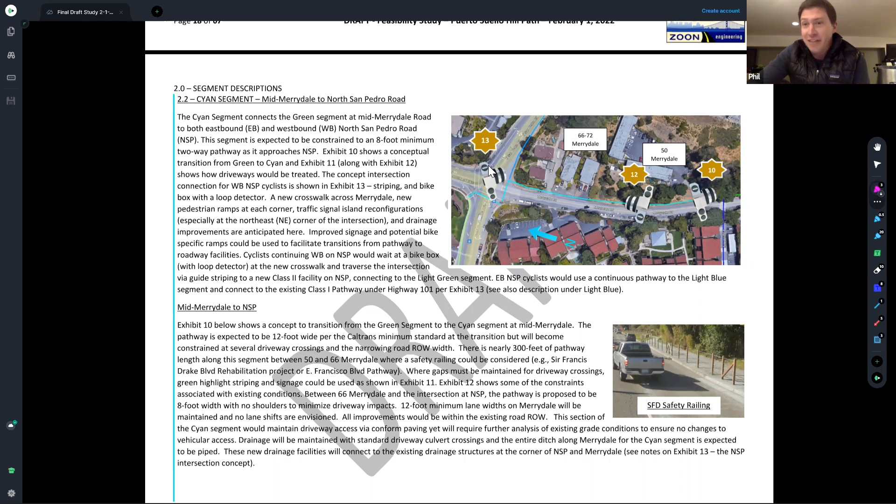I certainly appreciate that, and I understand that. My only worry is I think it's pretty clear that many of us on the BPAC have a preferred alternate. And if it were to be one of these paths that uses the blue route, I would start having very strong opinions about moving things forward. Now that weighs into the feasibility study because obviously those changes would make things much more expensive. So if you're starting to think about the proposals and you had some expected dollar amounts on there, for that blue option to be a feasible alternative, I would argue it would need that additional however much that big road would be.

I know this is early, so we don't need to get into that, but I guess I hope that maybe we could have a little bit of input as things go further, and I think we certainly will. So I appreciate the process and all the thoughts that you put forward.

Yeah, and hopefully, just to reiterate, this is the summary table and executive summary. You have the tools to make those well-informed decisions about cost, the constraints needed to move forward for the different segments. So, future bike rider or existing bike rider, hi.

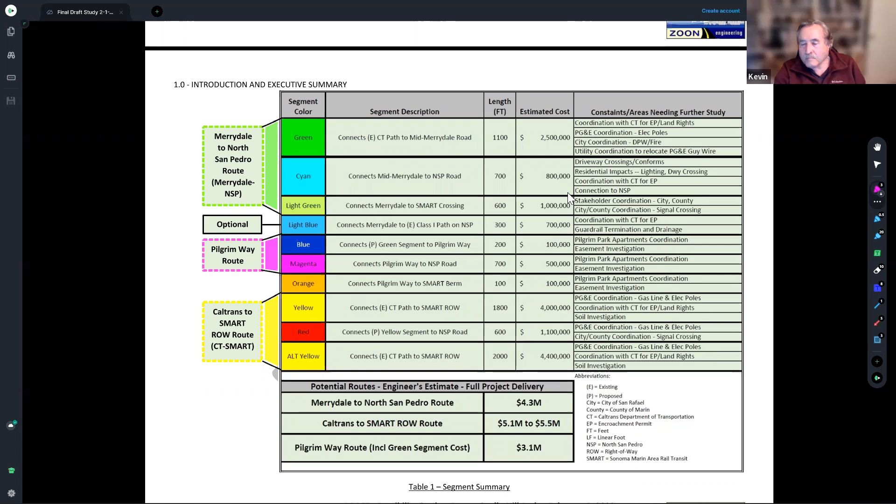Yes, hi. Thank you, Ernest, for a wonderful, thorough presentation. I very much support the comments to support the CT-SMART alignment, because what I'm looking for is a big jump up in user experience.

For me, the class 2 is a non-starter. It's not worth doing the project if you have to get on the street. I also agree with Phil, the lower part of Merrydale would be intimidating, and I don't care for going through that intersection at the bottom at all. That's a terrible intersection, no matter how I go through it on a bike. So I don't think we should be going down Merrydale and through that intersection to do this. Whatever it takes, let's do it a better way than that.

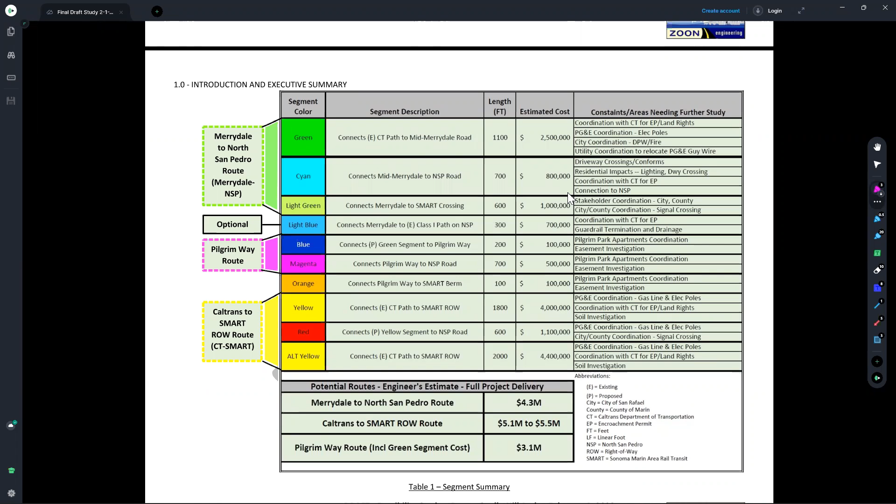User experience is like there's the pleasure of it, but we also know that two-thirds of people won't ride a bike on a street with a car. They won't share the street with a car, that's why they don't ride a bike. So if we're really going to try to make the North-South Greenway good for people to share, the 62% of people that need to be completely separated from cars, I'd say let's make that user experience like 80%: 20% is the trees, and 60% is being completely separated from cars on a class 1. Thank you.

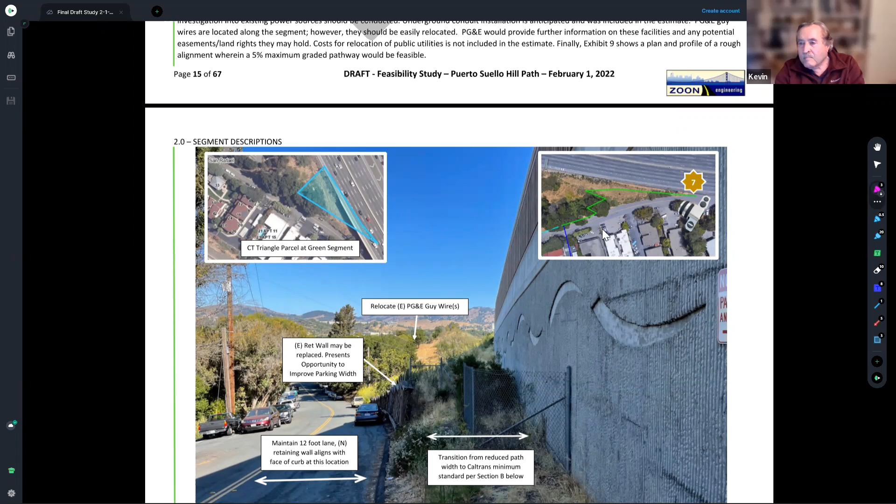Hearing none, I will close the item. I want to thank Ernest and Bill for showing up and participating in the meeting, and also appreciate April and Lauren's comments representing the city. Thank you, we'll see you out there on the road. Thanks, Bill. Thanks, Ernest. All right, have a good night. Bye-bye, take care, thank you.

So we'll go to the next item, which is the ATP grant application update. Lauren, are you going to give that, or is April? That's me. I don't have much, well I have one little visual I can show you, but I'm actually going to piggyback and make this a more general grant application announcement.

I can't remember if I mentioned it, but we are actively in the Canal Community-Based Transportation Plan, which is a very focused plan for the Canal neighborhood. We've been having stakeholder working groups and technical working groups. We actually had our first stakeholder working group held completely in Spanish last night, and I think it's been a really great opportunity for folks living there to express how they feel and give their opinions on transportation challenges in that neighborhood.

Some of the things we heard was the street lighting - they wish there was more street lighting in the neighborhood. And also a lot of comments about the buses, so maybe the lack of bus routes, especially the bus routes to Terra Linda High School for those who are going there, and then the cleanliness and the lighting at those shelters. So we hope to work with Marin Transit more and see how we can make those kind of improvements happen.